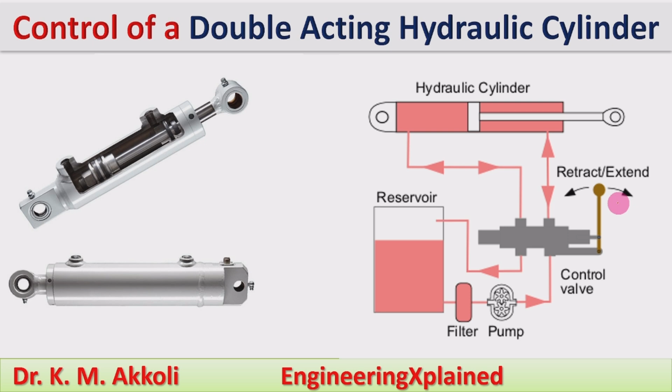Here, double acting cylinder means: in the single acting cylinder, the pressurized fluid will be supplied only on the piston end side, and on the rod end side there is a spring, and by that spring force only the retraction of the piston is taking place.

And here in the double acting cylinder, on the rod end side also the pressurized fluid is supplied during the retraction stroke. This double acting cylinder is particularly used where the load is applied during the extension as well as during the retraction. Usually the load is applied on both side movements of the piston, and that is called a double acting cylinder. And this double acting cylinder working we can explain. First we'll take what parts are there.

Here also the same tank, the filter and the pump we are going to use, and the direction control valve. Here the 4 by 3 directional control valve we are going to use. That means 4 ports and 3 positions. This direction control valve we are going to use for controlling the double acting cylinder. In single acting control, we can use the 3 by 2, but here we cannot use that one. Here we require the 4 by 2 direction control valve.

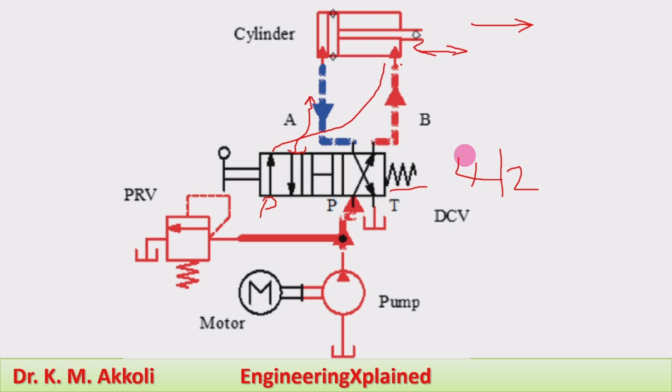First we'll take the left position. Here the pump line will be connected to the piston end side of the cylinder. This is the piston end side of the cylinder. During that time, the line from the rod end side will be connecting to the tank, and during that time the extension of the piston is taking place. And that is the left position, it is a working position.

In the neutral position or neutral envelope, the flow from the pump is directed here. Here the pump line is closed, and the tank line is connected to it. The pump and tank line both are connected, so whatever flow is there from the pump is coming back to the tank line. Actually, this is the pump line and this is the tank line.

Commonly, the pump line is directed to the tank, and while switching between the left envelope and the center position, if the pressure builds up, the pressurized fluid will be directed by the pressure relief valve to the tank. Here to the tank the pressurized fluid will be directed.

If it reaches the right envelope position, the flow from the pump will be directed to the rod end side of the cylinder, and during that time the retraction of the cylinder piston is taking place. On the other side, the fluid we already supplied on the piston end during the extend stroke should flow back to the tank line through the direction control valve. Here we can see it is coming back to the tank line through the direction control valve.

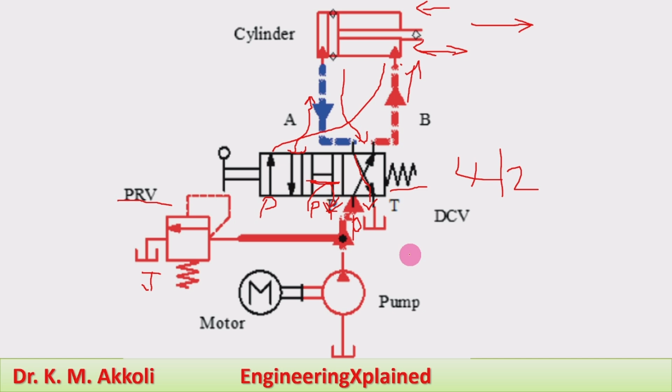Like this, the working or controlling of the double acting cylinder is taking place. And this working we can also explain here by using this explanation. The four-way direction control valves are commonly used to control the operation of double acting cylinders. The four-way, whatever it is, 4 by 3 or 4 by 2. Whatever the positions and number of ports, you can call it that many ways.

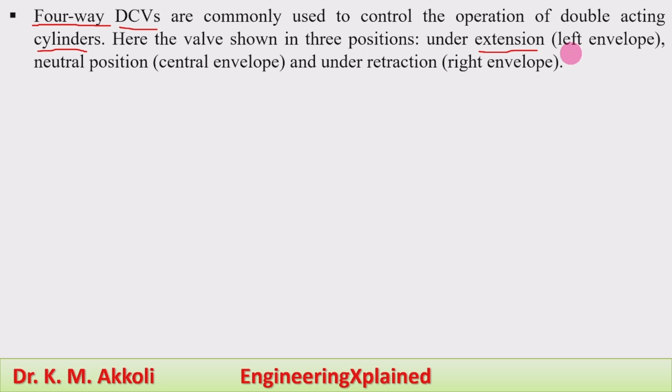The four-way direction control valve is commonly used for control of the operation of double acting cylinders. Here the valve is shown in three positions. One is extension: during extension, the left envelope or left position is used. Neutral position uses the central envelope, and under retraction, the right envelope of the direction control valve is used.

When the valve is in neutral position, the pump flow continuously flows back to the tank through the DCV. If it is in neutral position, the pump flow is directed to the tank through the direction control valve. Hence, the actuator and pump are not pressurized. During that time, no actuator is pressurized and the pump is also not pressurized.

When the valve is actuated to the left envelope position, the pressure line is connected to the piston end port of the cylinder, while the rod end port is directed to the tank. Under the pump pressure, the cylinder extends. At the same time, the oil from the rod end freely flows back to the tank through the DCV.

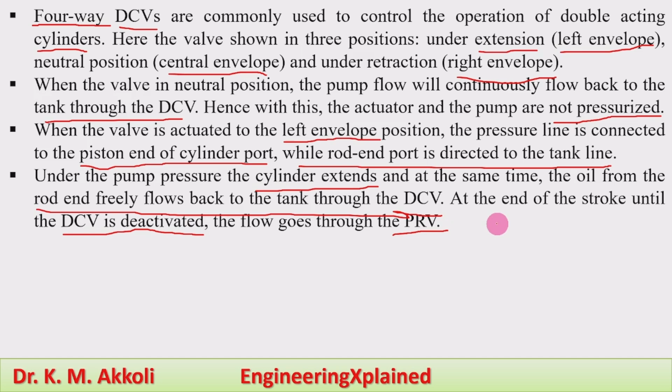At the end of the stroke, until the direction control valve is deactivated, the flow goes through the PRV. During the change from one position to the other position, the fluid pressure goes through the pressure relief valve.

When the valve is actuated to the right envelope position, the pressure line is connected to the rod end port and the piston end port of the cylinder is connected to the tank line. This causes cylinder retraction with the oil from the piston end flowing freely back to the tank.

At the end of the stroke, during the switching time, the pressure builds up in the system, and that is released by the pressure relief valve, which opens and the flow goes through the relief valve to the tank. Like this, the controlling of the double acting cylinder is taking place.

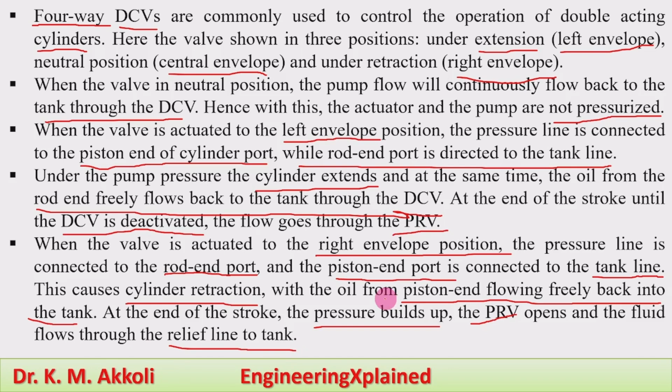Here we can see the animation of how the controlling of the double acting cylinder is taking place. This is a vertical cylinder; this side is the piston end and this is the rod end side of the cylinder. During extension, the pressurized fluid flows into the piston side and the working takes place. During that time, the flow from the rod end side goes back to the tank.

During retraction, the pressurized fluid flows on the rod end side and fluid from the piston end side comes back to the tank. And this direction control valve is a spring centered, lever operated direction control valve. For the three positions, we can take them as we have taken previously; from that we can come to know.

And here this is the pump, this is the actuator line, and this is the back line, the tank line. These are the four lines and how they connect. The pump line connects to the direction control valve, the actuator line connects during extension, and the back line connects to the tank. And this is the pressure relief valve.

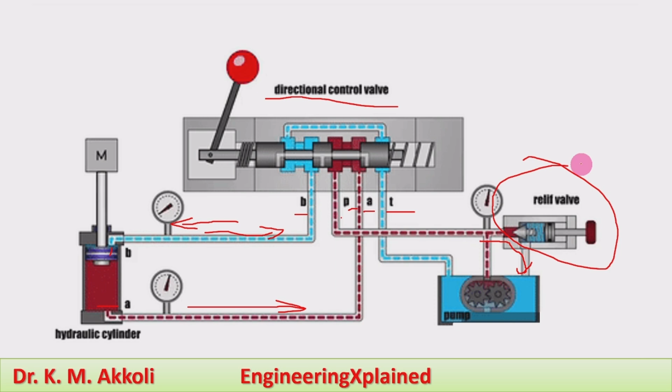During switching between the two positions of the direction control valve, if the pressure builds up because time is taken for switching, the fluid goes back to the tank through the pressure relief valve. We can see here fluid going back to the tank when the pressure builds up. Like this, we can carry out the controlling of the double acting cylinder. This is the very simple basic working of the hydraulic system, and I am going to explain the different types of systems in further sessions.